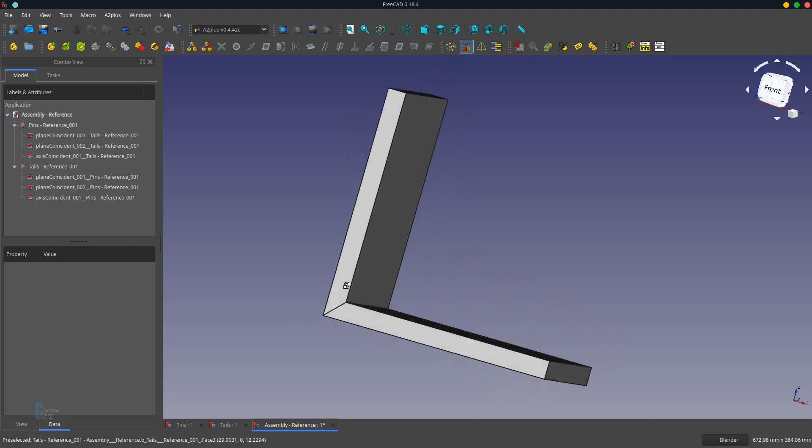It is used in situations where you want the grain from this board here to wrap around the edge and go onto the other board without any of the joinery showing.

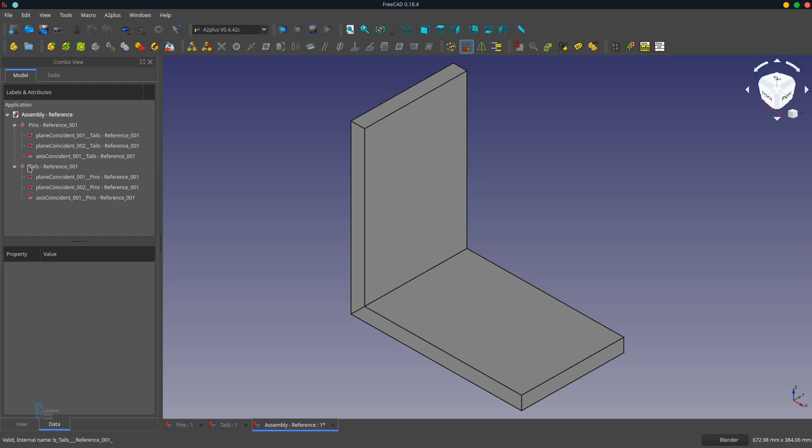The joint is made using dovetails, and if you would like to learn more about how to make those, you can see that in a previous video, which I'll link above. Inside the joint there is a set of pins and a set of tails, just like in a regular dovetail, and they mesh together to provide a very, very strong joint. As can be seen here, you've got your tails and these are your pins.

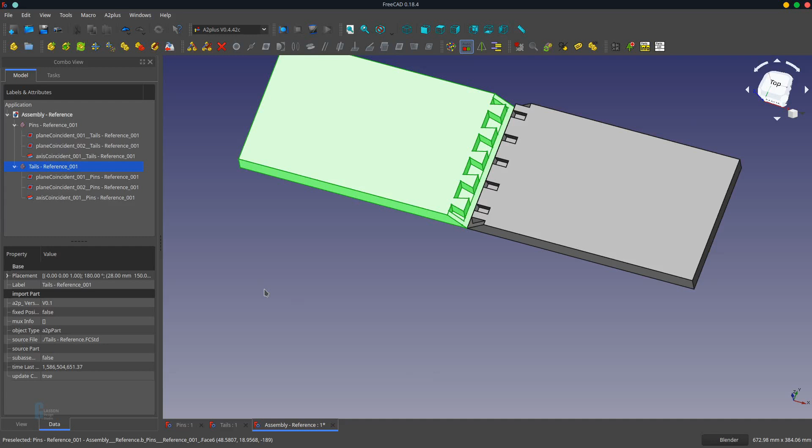So we're going to model this today. Now I've already set up a pin board and a tail board, so we'll just get straight into it. To simplify things for this demonstration, I created a couple of models that contain spreadsheets in them. The spreadsheets simply have the same information and define the board and the pins and tails.

So we've just got the length, width, thickness, lap - this is the distance from the edge of the board to where the pins and the tail start - the half pin width, the full pin width, and the length of the joint.

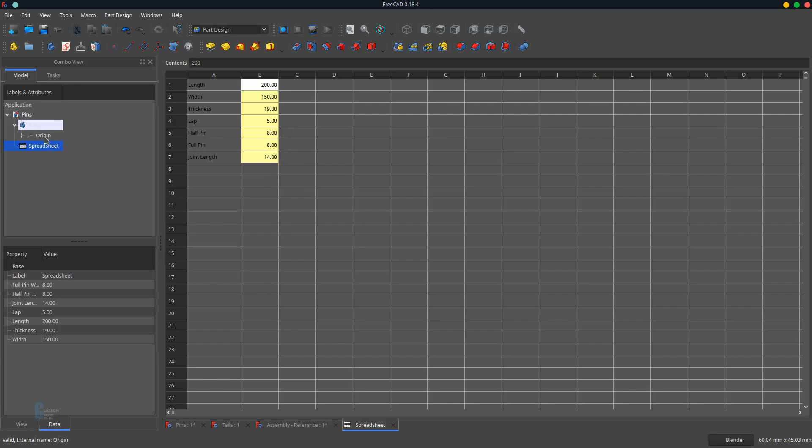So we'll switch over to the part design workbench. We'll work on the pins first.

So we'll create a sketch in the XY plane, and it's going to be a rectangle that is symmetrical around the origin. In fact, there's two ways you can do that. You can either do it by putting two lots of constraints, one across the width, one across the height, or we can simply just pick top left, bottom right, and the center point and do the same thing. It's probably quicker that way.

Now we've got 4 degrees of freedom, because we're missing a couple of constraints, so we'll just put those in. This needs to be a vertical constraint, and this is a horizontal constraint, and then we'll set the length and the height.

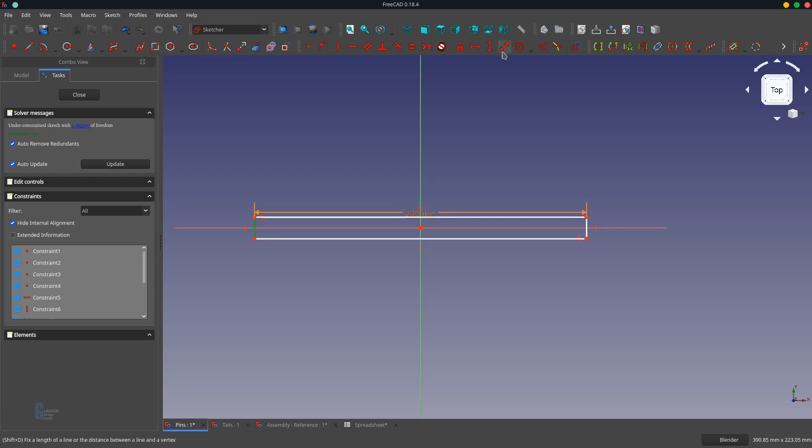Now these come straight out of the spreadsheet. So one is length. Whilst I've been saying height, in this case it's actually the width of the board, so we'll set that as well - width.

Fit, and then we'll just pad it out to be the thickness specified in the spreadsheet. There we go.

Now the design of both the pins and the tails are the same up to a certain point, and we're just going to repeat them in both cases. Typically you might choose to start with the pins, and when you got to the point where you have to deviate to do the different bits of the design, you would save it as a second copy. In this case I'm just going to do both - it's not a big deal.

So what we're going to do is make a space for the lap. We create a sketch on one of the long faces, and we bring in some external geometry, and we're going to use a polyline. What we're going to do is simply make a 45-degree cutout which represents the lap.

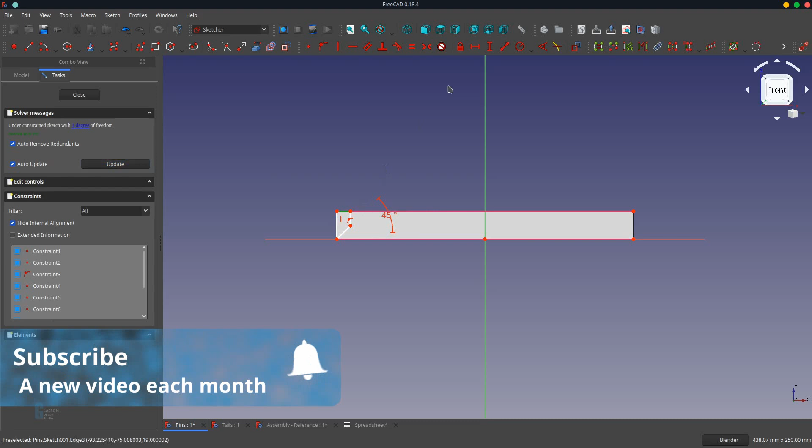That is vertical, and this angle here, we're going to set that as a 45-degree angle. We've got 1 degree of freedom missing, which means that length there is actually the length of the lap, which is in the spreadsheet. So we set that in - that's lap.

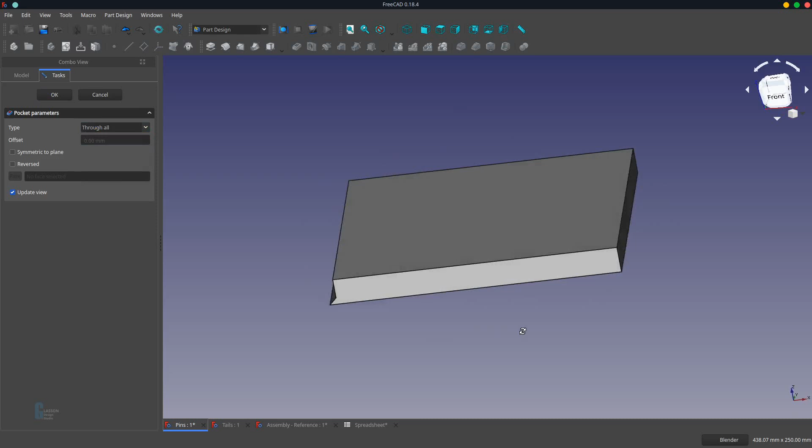And we're fully constrained, and then we just cut it off. Now that we've got the lap, we need to look at what else we need to do.

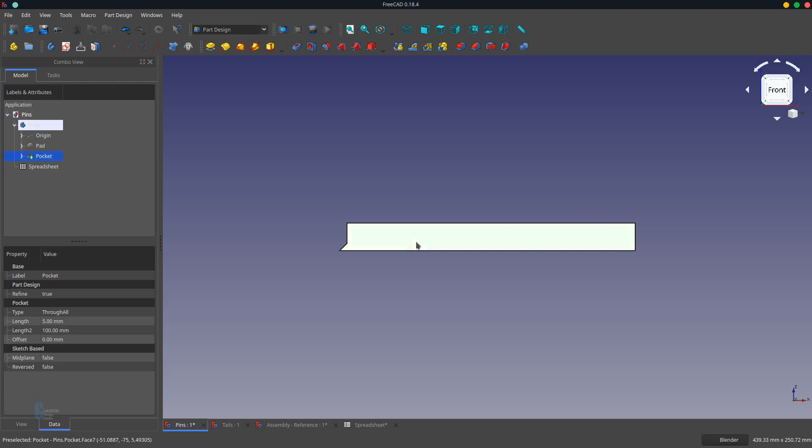So if I jump back to the assembly and just show you the pin board, you can see that there is a full length mitre here, which we need to put in place first. So we'll do that. We click on this edge and we're just going to create a sketch there. We will bring in some external geometry so we can work with it.

This one's a relatively easy one because it's simply an isosceles triangle. That's horizontal, and the length of these guys are equal, which, once I've got all the points together, will make it a fully constrained triangle.

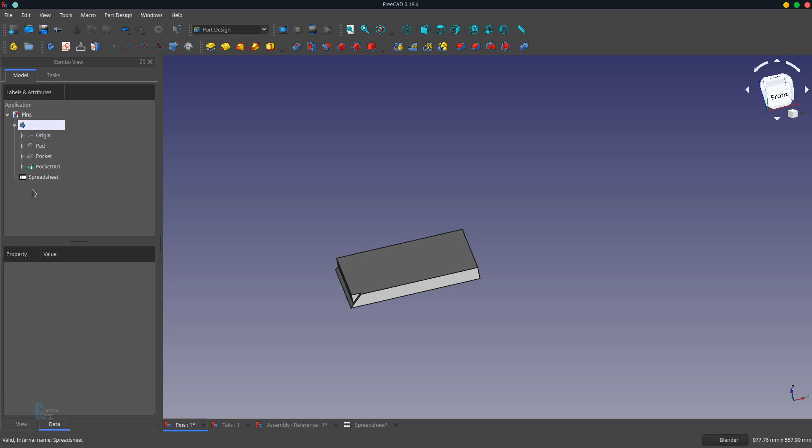What we're going to do is we're just going to make that a 5mm cutout, just like we have with the lap, and then we're going to mirror it on the other side. Rename that to mitre.

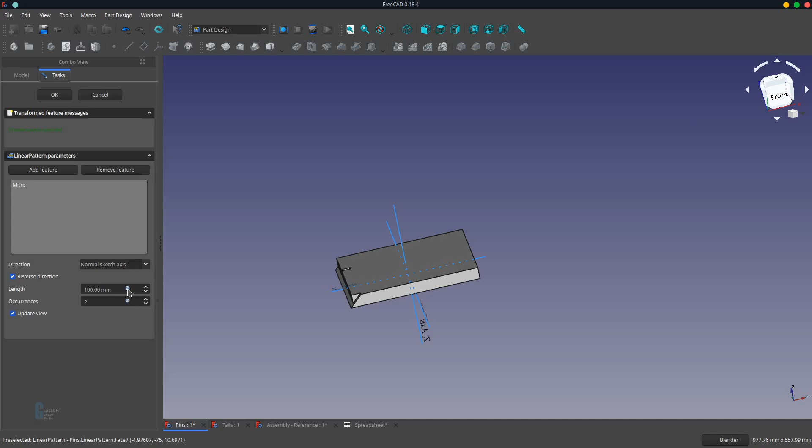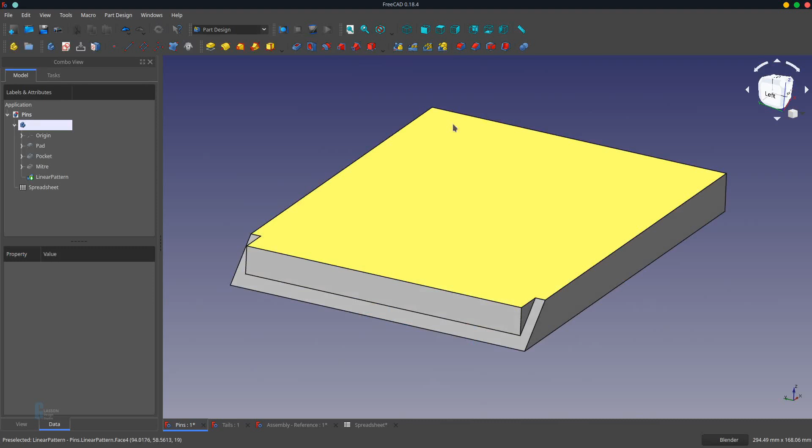There it is. Okay, so normal sketch axis, reverse the direction, and it is spreadsheet width minus the 5 millimeters from the other edge, which puts it right into the place that I want it.

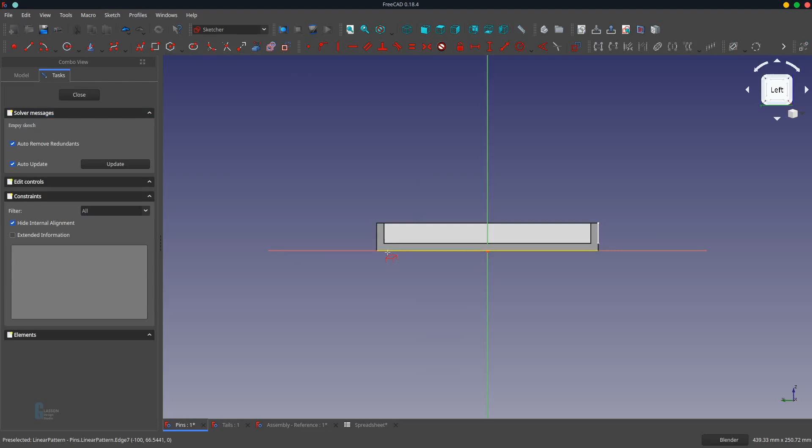Now if we jump back to the pin board in the reference assembly, we'll see that we've got to start modeling the pins, or the cutouts for the pins. So we create a sketch on this face, bring in the reference geometry, that one, and that one, oh, and one more, and that one. We're going to model one of the pin sockets here, then use a linear transformation to make the rest. We're just going to create a polyline which represents the pin.

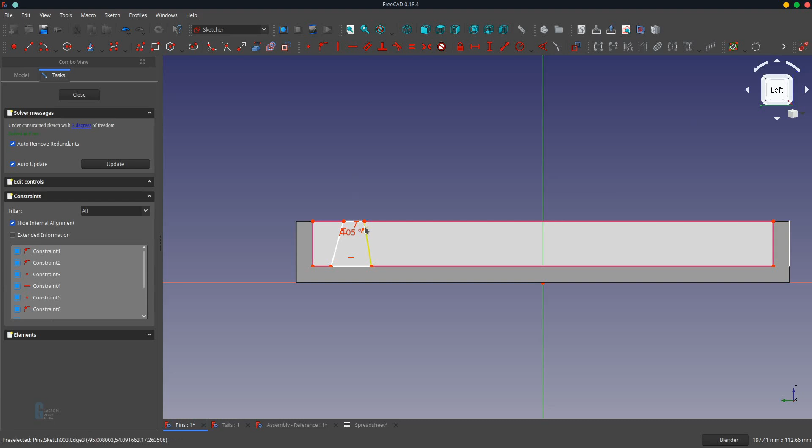Okay, cool. So the angle between here and here, we're just going to make 105 degrees, and same on the other side, 105 degrees. And then we have 2 degrees of freedom apparently.

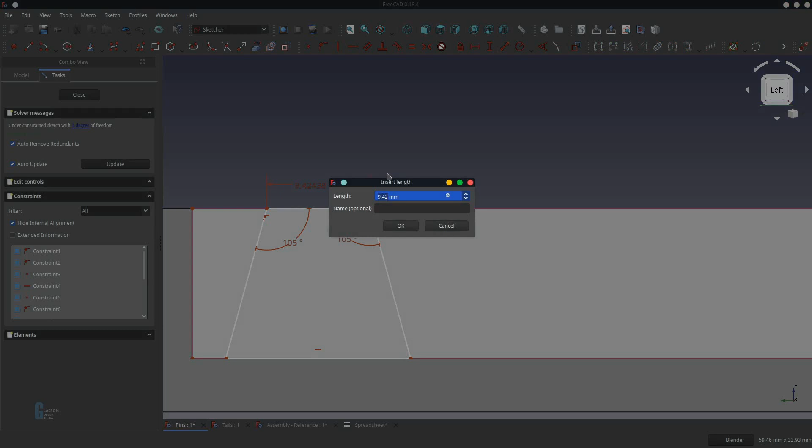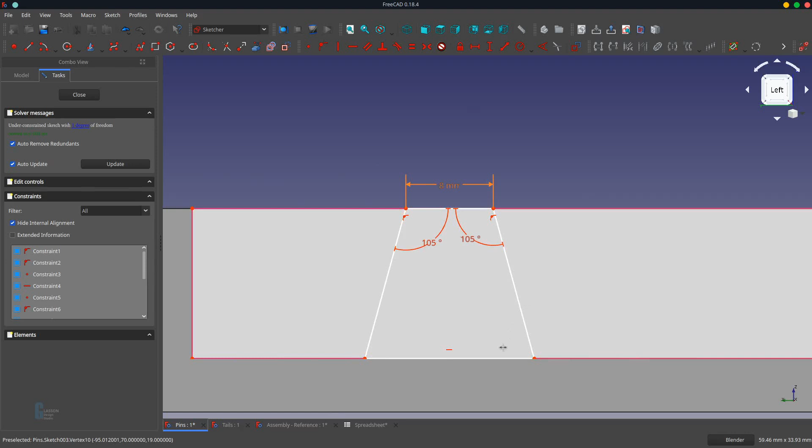So we'll set the width of the pin to be the half pin width, sorry, the full pin width, which is in the spreadsheet. Now we have 1 degree of freedom, and that is the distance from the end. Why is my computer playing up? Quickly close that, jump back in.

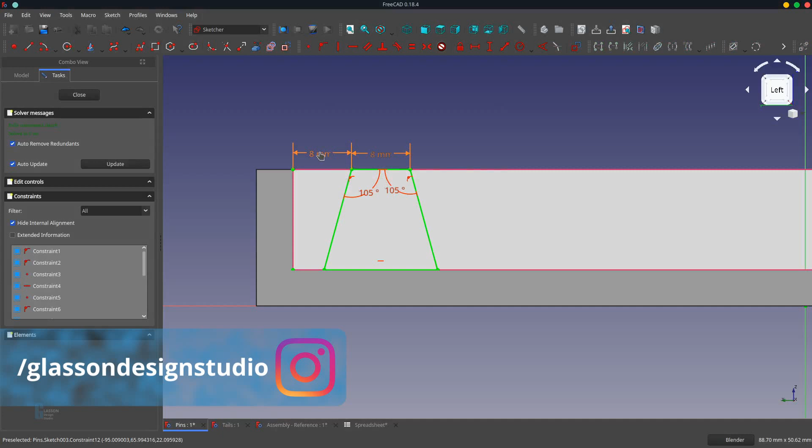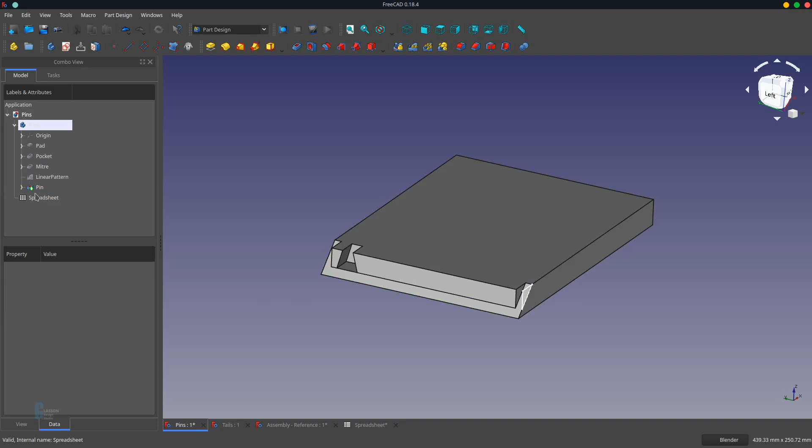And so we're going to go from here to here, and that is the half pin width. Now we have a fully defined sketch, and we are going to not pad that out. We are going to create a pocket. Joint length. Call that pin.

And then we're going to do a linear transformation. We want 5 of them. And the spreadsheet, the distance that we want is the spreadsheet dot width minus 2 times the spreadsheet times the half pin width minus 10 for the 2 miters.

1, 2, 3, 4, 5, and that hasn't quite got it right, has it? So maybe it's just minus the miters, because the half pin width.

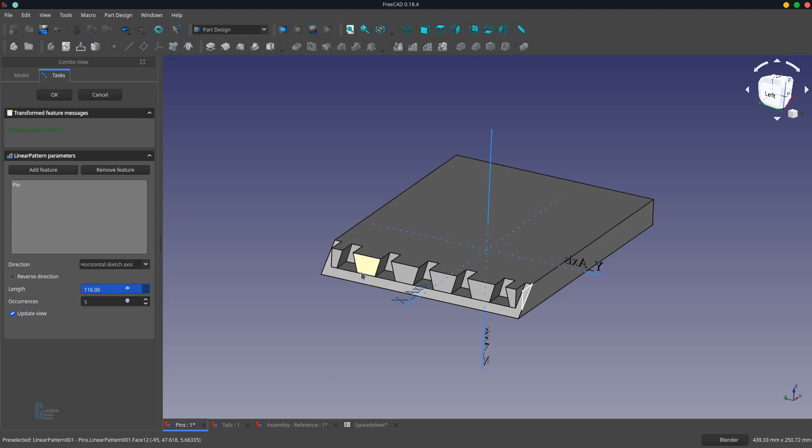Maybe spreadsheet dot full pin width. Okay, that's better. 1, 2, 3, 4, 5. Okay. Where I went wrong in this one is I forgot about having to take off the first pin as well. So that gives us our pin board all ready and done.

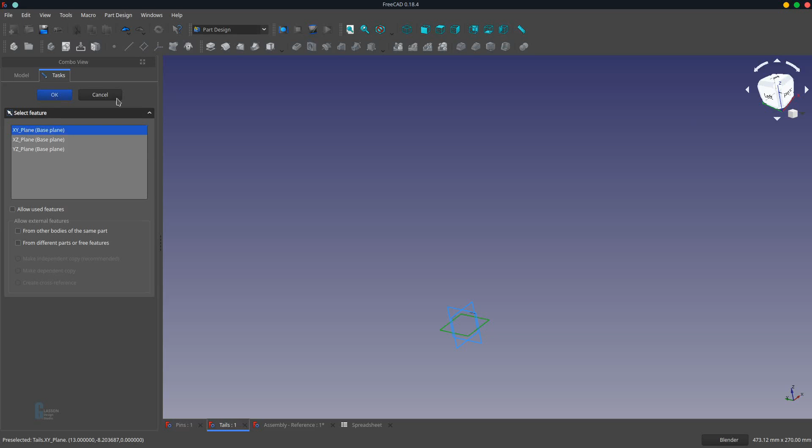So what we're going to do is jump across and do a similar sort of thing in the tail board. So we've got the body in place, so we'll create a new sketch on the XY plane. Just going to put a body around it and make it symmetrical to the center line.

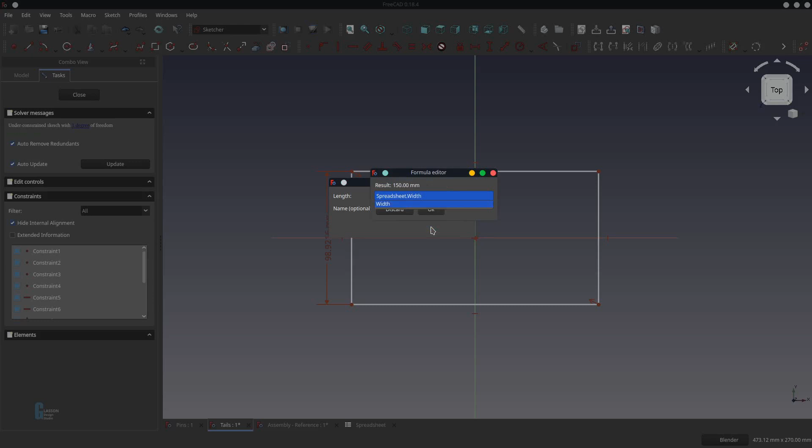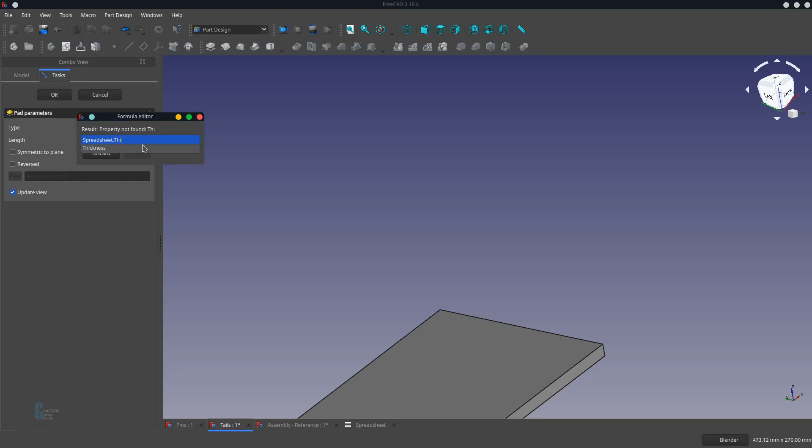The width of it is defined in the spreadsheet. Same with the height, the length. And we pad that out as before to this thickness. Okay.

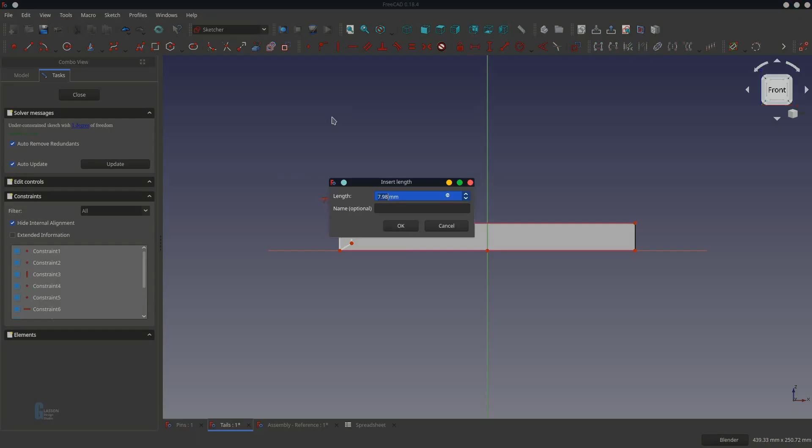It's now time to do the lap. So we create a sketch. Yeah, it's fairly easy to do this one. It's really just repeating what we did last time. Width of that bit is the lap as defined in a spreadsheet. And the angle here is just 45.

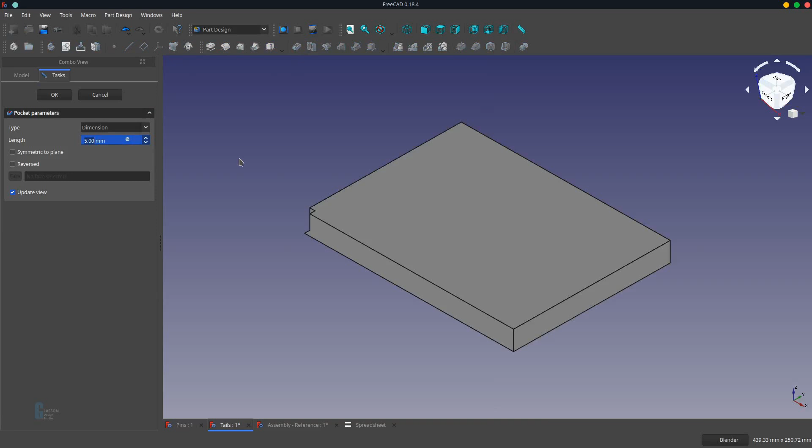We then create a pocket the whole way through. Call that the lap. And then what we're going to do is we put the miter edges on. So again, we create a sketch on the same face, bring in our geometry.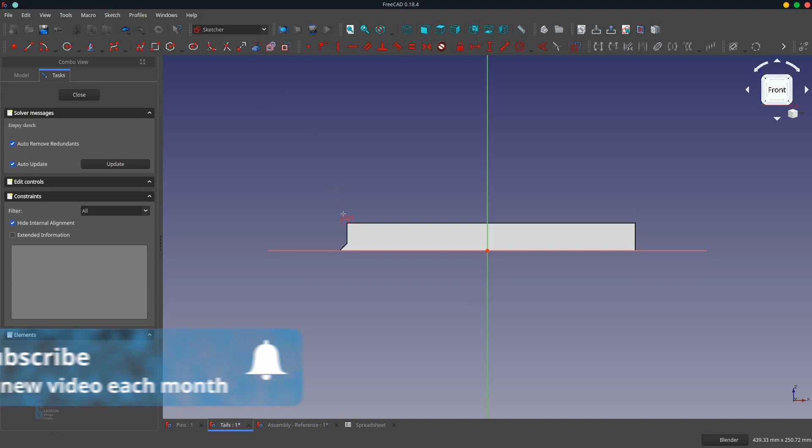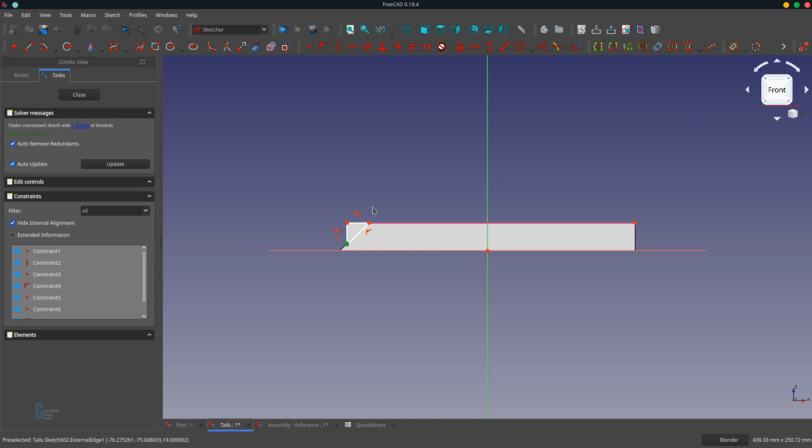These guys are equal, and oops, we didn't quite get that joint right. Close that up, and we make a pocket of 5 mil. Miter, and then we're going to mirror that to the other side.

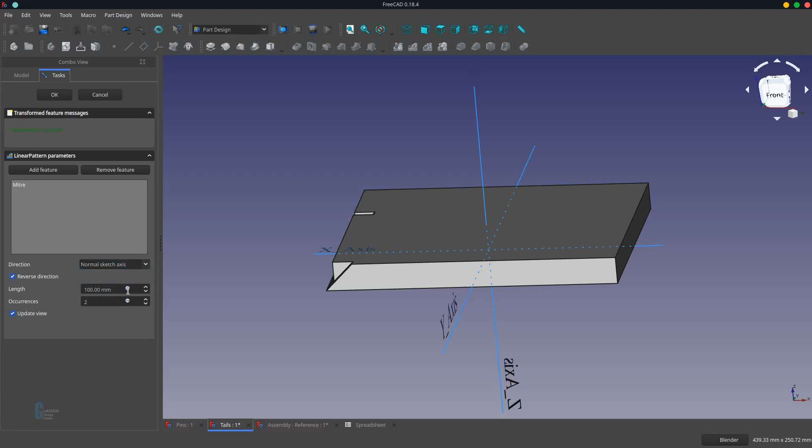On the normal sketch, it's reversed, and width minus 5, and okay.

So now we're going to do the tails. Create a sketch on this one. And we're going to remove everything that we don't want. So first up we'll do the half pins.

That one's a vertical, and it is the half pin width as defined in the spreadsheet. Now it's easy to get these turned around, so we'll have to check them once we put the assembly together. And we're going to cut a pocket out of that, and it is going to be the joint length.

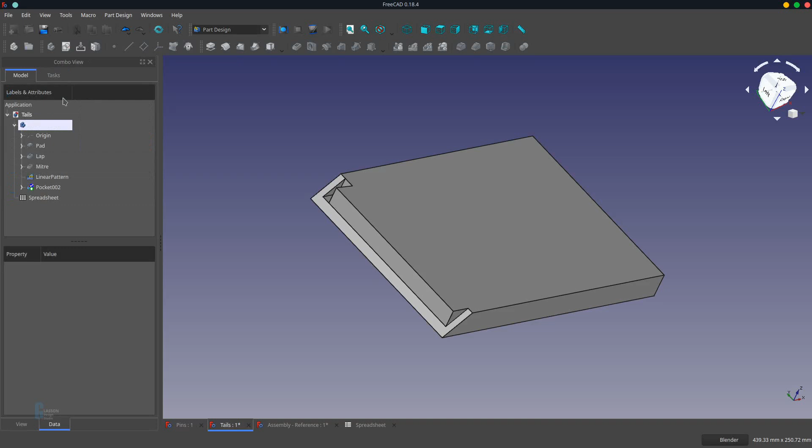Half pin, and then we're just going to use the linear feature to get rid of the other one. Vertical sketch, that's right. And it is going to be minus spreadsheet width minus the mitre, I think. See how that one goes.

Oh, too far. Alright, so what it means is we then also need to remove the half pin width as well. Should remember that from last time. 2 times the width, 2 times the miters.

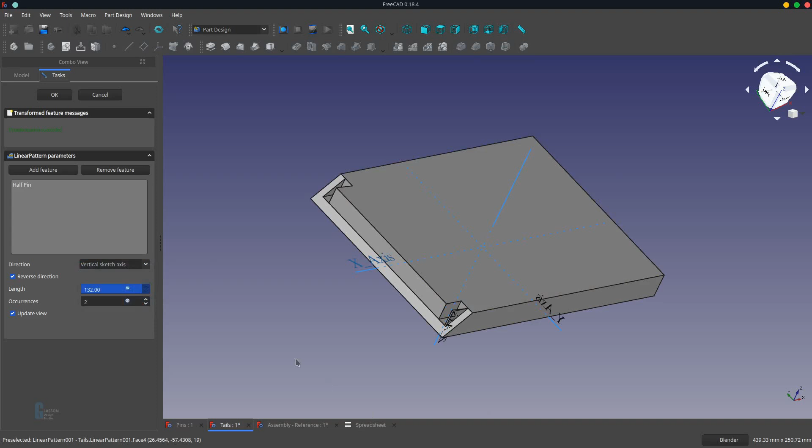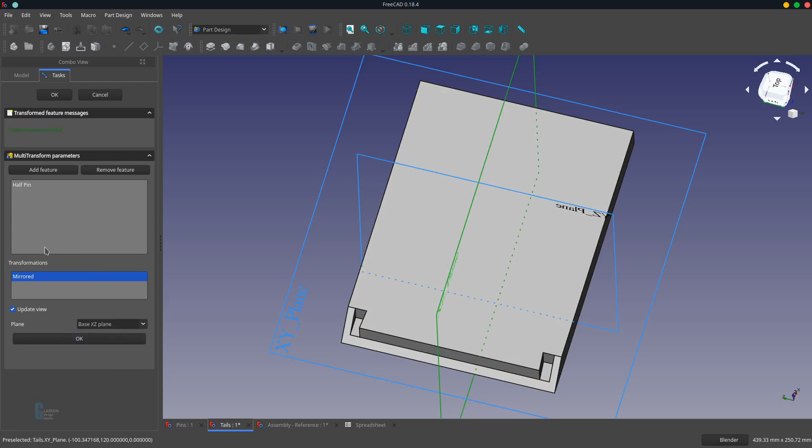There we go. And it's not a, it's a mirror, you idiot. Cancel that. We're going to add a mirror. Mirrored on, there we go, on the vertical axis. That gives it, that makes it so much easier.

Now we'll do the other pins - remove the other pins, I should say. So we bring in that and that. Again, we do a polyline.

That one there, the base of it is the spreadsheet dot full pin width, and this angle here is 105 because we want it going out, and we've got 1 degree of freedom in here somewhere.

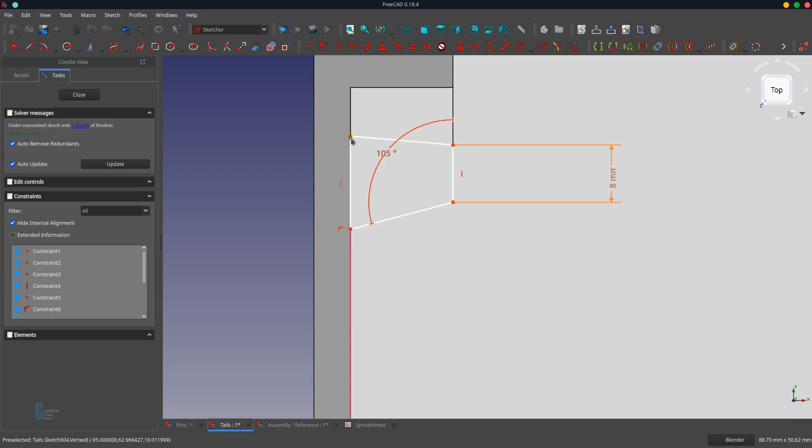Okay, so we've got these 2 points not coincident and joined, so now they are. Oh, we went the wrong way. Sometimes it happens. I'm an idiot. So we'll get rid of these.

I need to bring that one back in again, because as I said, it can be quite easy to get these things turned around if you're not concentrating as much as you should be, especially when you're thinking in terms of pins and tails, and forgetting that you're actually taking away the waste, not keeping the bits you want to keep, which is how you would sort of do it when laying it out.

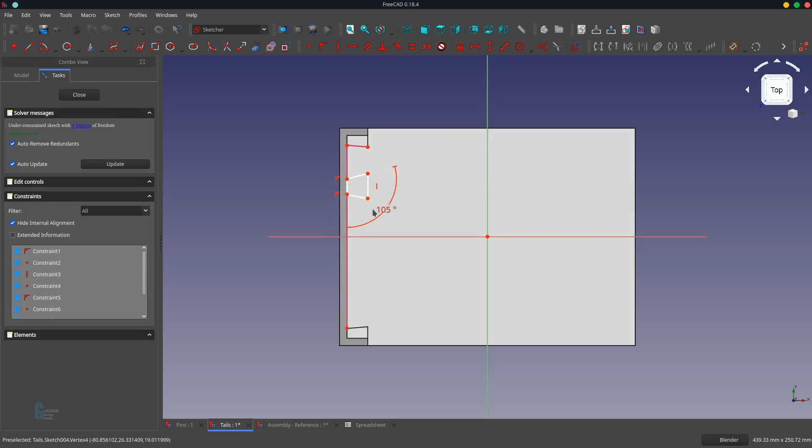You would do - when you're laying out the tails, you measure out the tails and then cut away the waste. In this case, we're sketching the waste to cut away. So sometimes I find it easy to get my head turned around and not think, and get them, and do the pins when I'm supposed to be doing the tails, and vice versa.

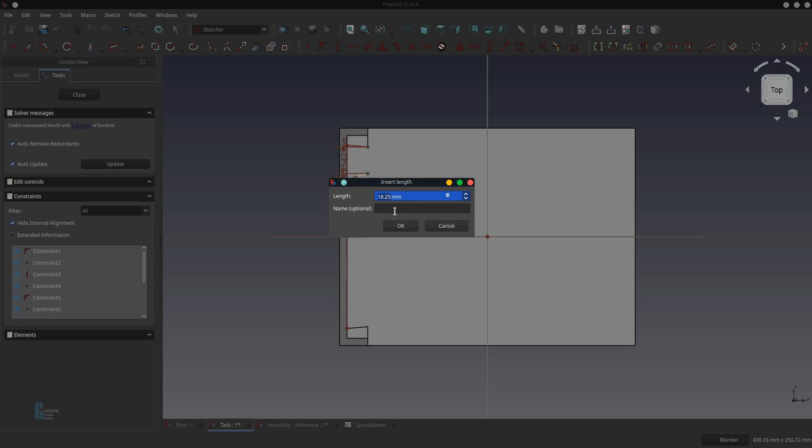Okay, so from there to there is the full pin width. Actually, no, this one I think we're going to struggle a bit. That's the full pin width.

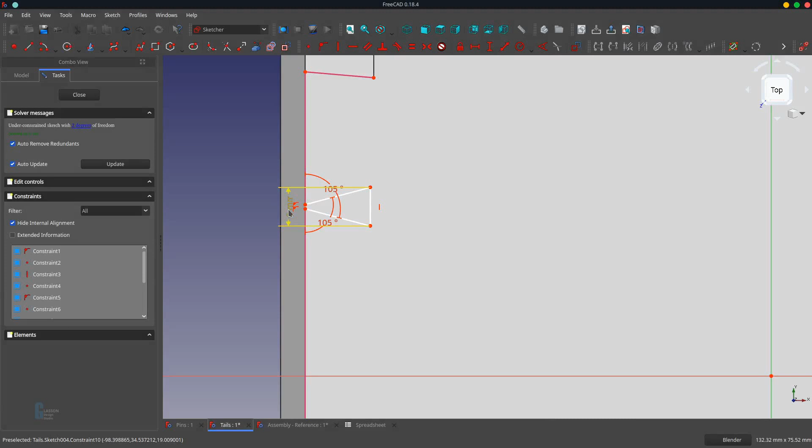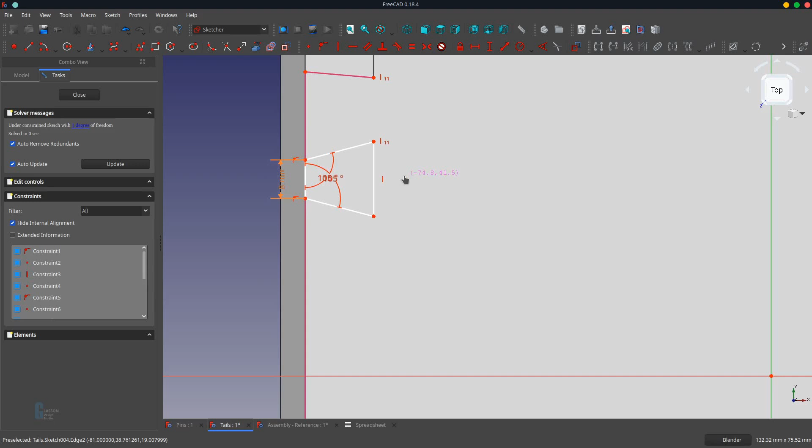No, in actual fact, the full pin width is actually on the front. Put a vertical constraint in there to make them the same. Now we're just moving here. So I've got a funny feeling we might just have to sketch all the bits. Might be just as quick.

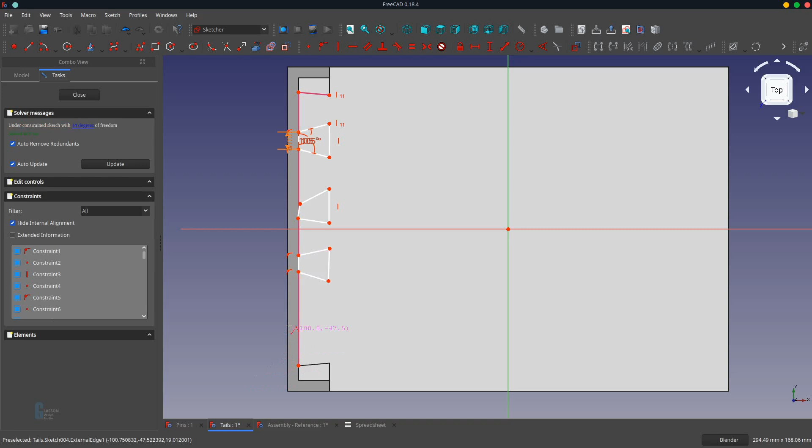That vertical, that, and that are all equal. That, and that. Oops, these are not joined. Let's fix that. These guys are all parallel, and so are these guys.

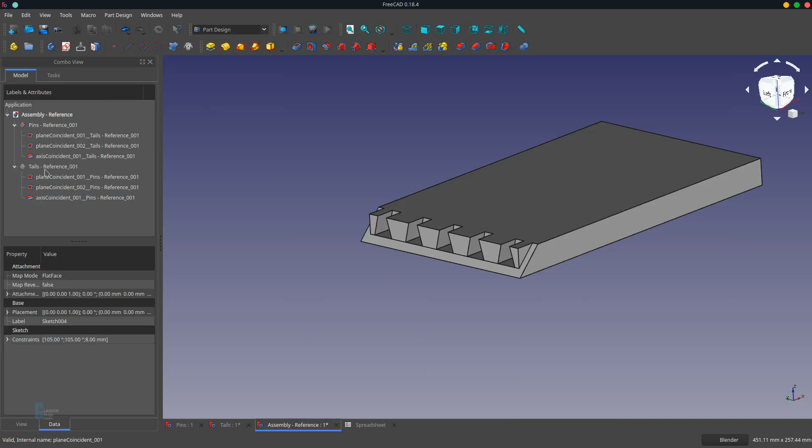Alright, so I'll switch over. Hang on, before we do that, let's quickly check. Go back to turn off our pins, come back to our reference, and we'll see that we've got 5 tails. So I need to put another one in somewhere.

Constrain that to be vertical. Again, also make these guys all - probably doesn't matter because I'm going to stick some construction lines in a moment just to help finish it off.

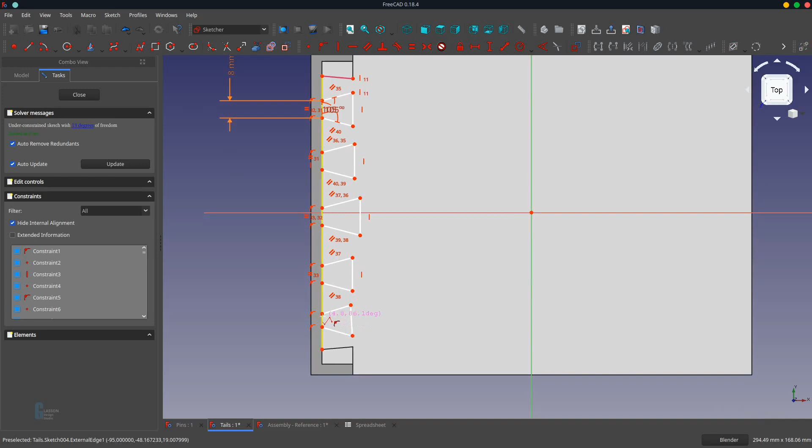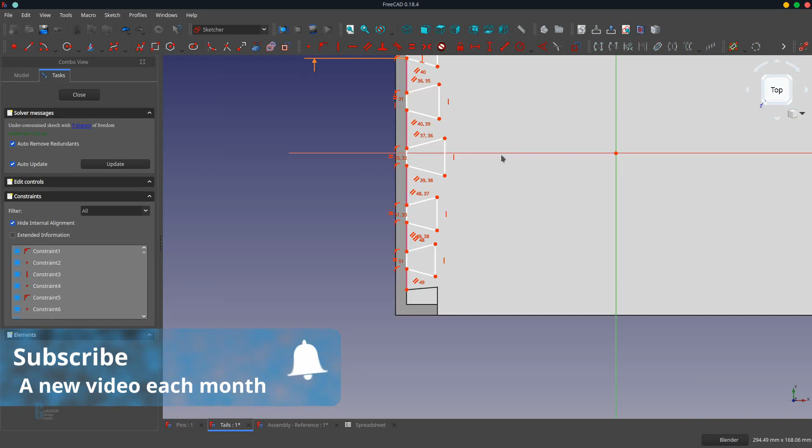Parallel, that and that. Parallel, that one is vertical. That and that are equal. So now we'll click the construction lines in just so we can...

That one's vertical, that one's vertical, that one's vertical. Put those together and put those together. And that one too is vertical.

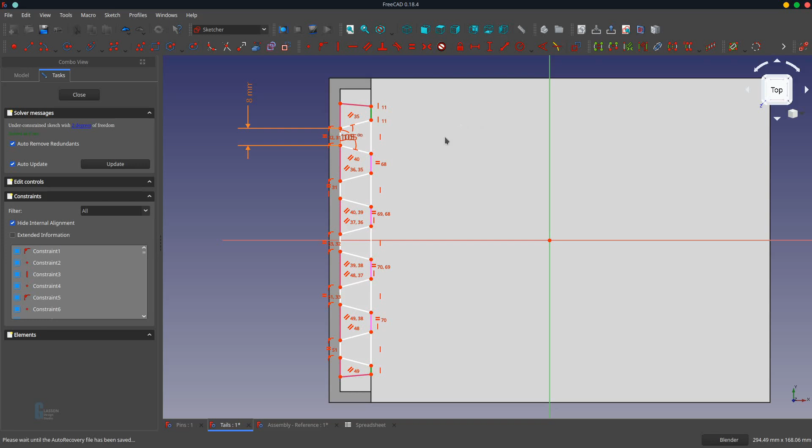So we've got 5 degrees of freedom now. What's going on here? Okay, so they're all moving, right? Da, da, da. These guys are all equal as well, except that one. Equal. That and that. They're all equal to.

Right. And we're just going to punch those out, and that's going to be joint length. One, two, three, 4, 5.

Okay, so now what we'll do is we'll create an assembly and try and put this thing together. So we'll switch over to the A2 Plus workbench. Oops, forgot to save it. And we will add the pins, pin board, and we will add the tail board.

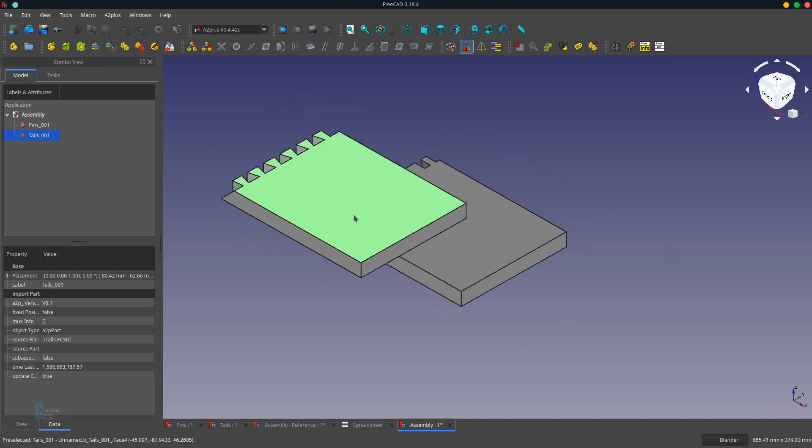And what we'll do is we will rotate the tail board, transform the tail board so that it is in the right orientation for where I want it to go. We'll just zoom in a bit and try and line things up, and as we can see, we've already got a bit of a problem here.

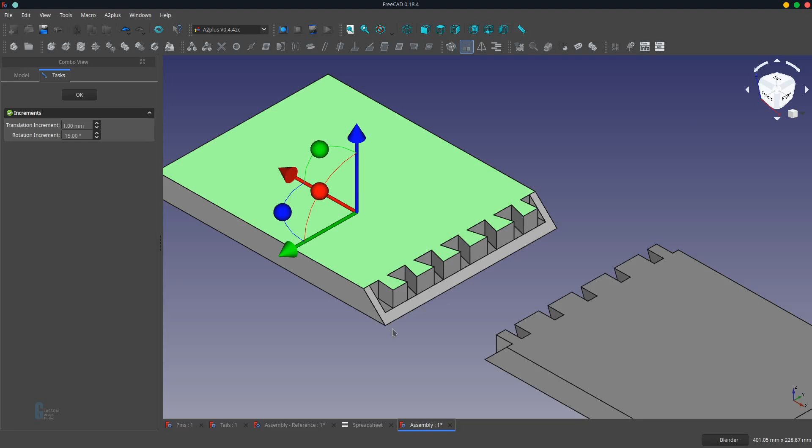So I've got six pins on this, or six tails on this side, and five pins here. Okay, so that's okay, we can go and fix that.

So jump back into the tail board, we'll go back into sketch, and what we'll do is just remove one of these and reassociate all the geometry.

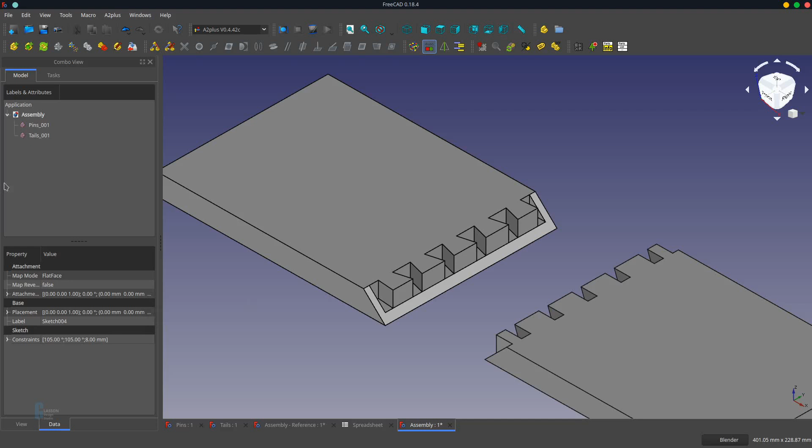Push that through, save it, and come back into the assembly and refresh it. And that's starting to look a bit better. And we'll finish the transformation, so we'll turn it at 90 degrees to itself, so it's vertical.

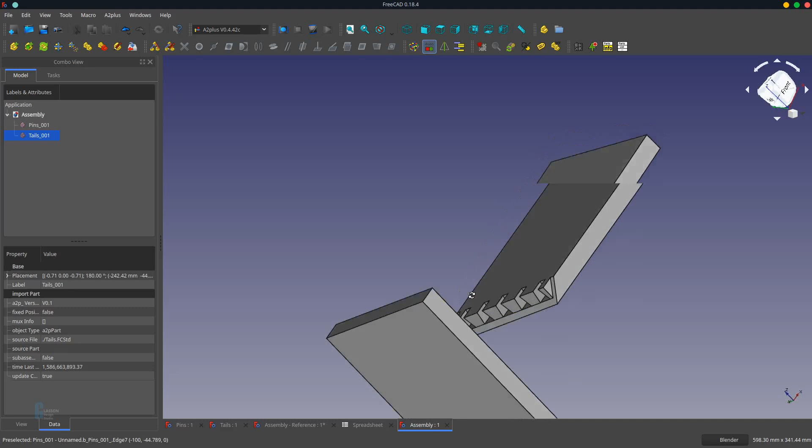Now what we're going to do is just try and constrain it together and check to see that I've got all the joinery correct. So we'll use that main face there and this face in here, and we'll do a coincident constraint, bring it together. Oops.

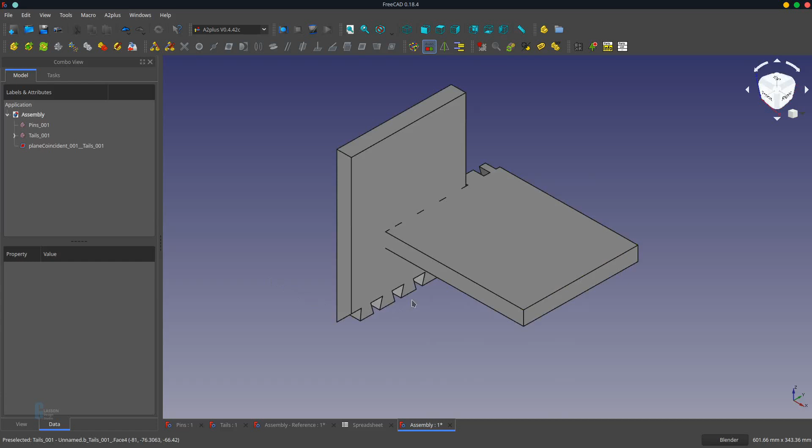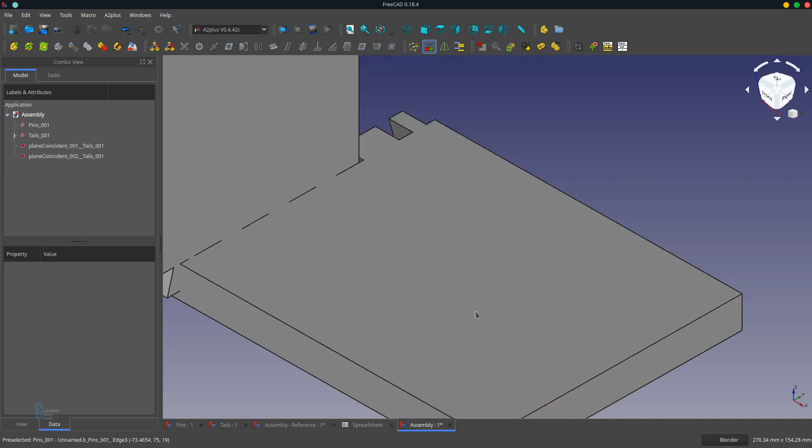And obviously I'm going to struggle a little bit at the moment, but we'll see how we go. So I'm going to select this bottom face, actually make it this bottom face, and zoom in on this bottom face and use that, doing a coincident as well, accept that. And so what we have now is that they are mostly in the right place. Zoom out a bit, but you can see it's an overhang.

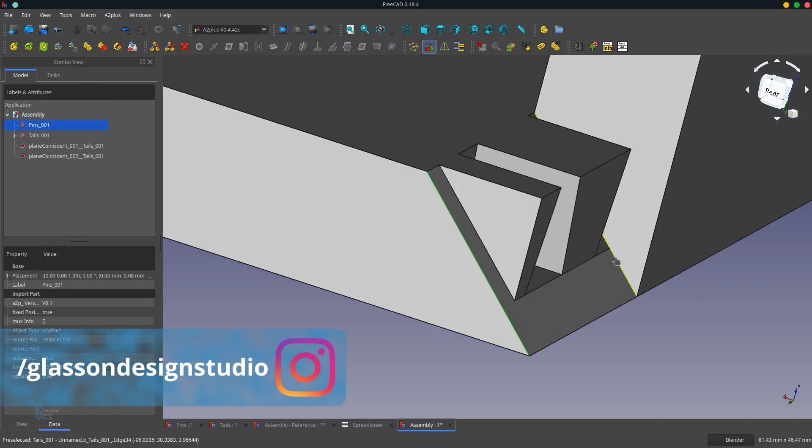So what we'll do is we'll go to the back view, a bit of an angle so I can see what I'm doing. I'm going to select that line there and this line here, and then we're going to do axis coincident constraints, pull it all together, and now we have, oops, now we have it put together.

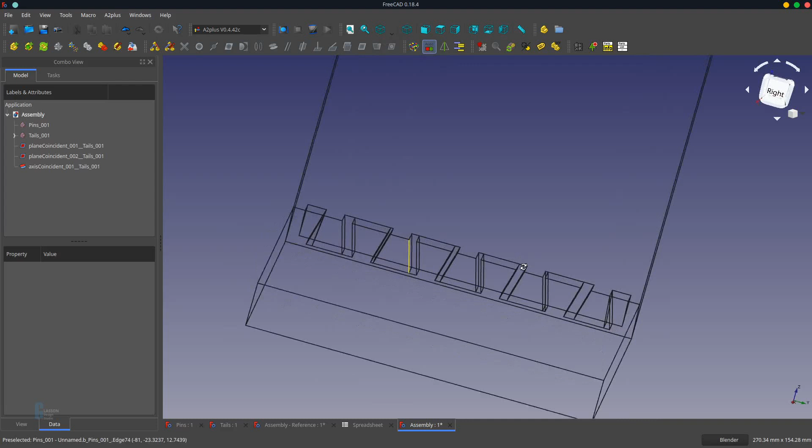What I don't know yet is whether I've got all my geometry right inside, so I'll switch to wireframe, and we can see that something obviously is not right. So that's the tail board, and that's the pin board. So it looks to me like the tail board is out, and again, this is what I was kind of getting at when I said you can get your head turned around.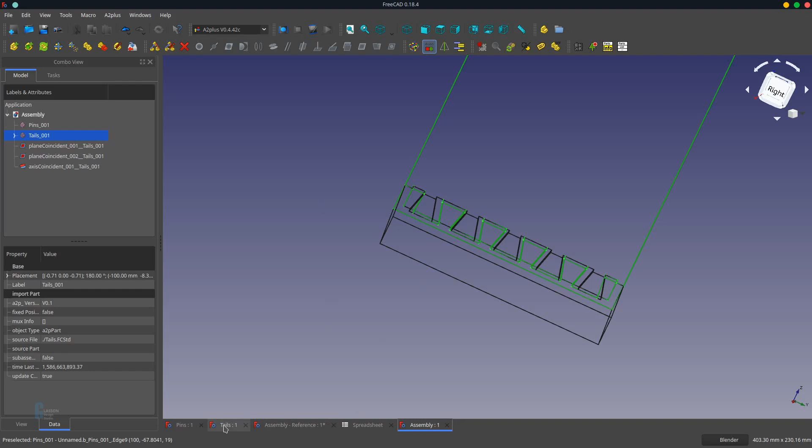So we'll save that and we'll jump back into the pin board, and we'll just quickly check the sketch, because what I think I've done is I've set the width of the half pin on the tail board to be here when it should have been there. Maybe it could be the other way around, but we will check.

Yes, and I think I did. So let's take that one out. Let's pop that on the other side.

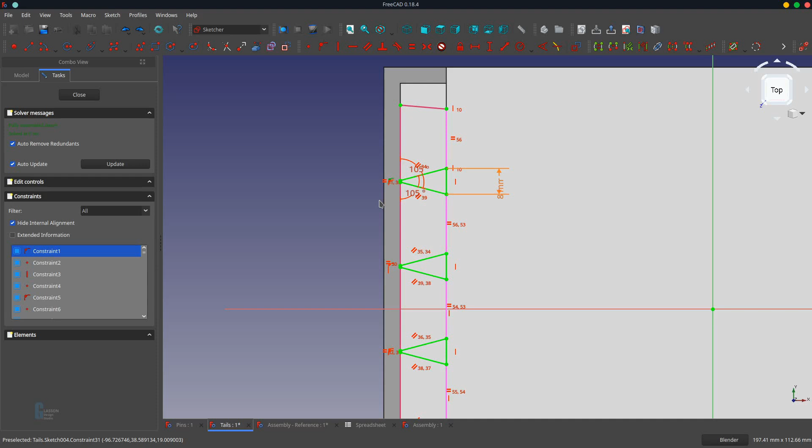But what makes it interesting is that that has now changed to here. So I think I was right the first time. And we'll leave it there. Maybe what I did was do it wrong on the pin board.

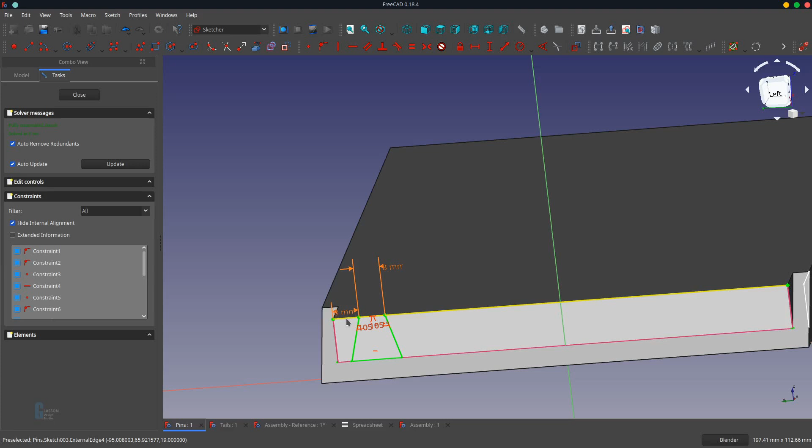So we'll go back to the pin board and we'll just check that. Yeah, that one's, maybe it's this. Okay, so come back into here.

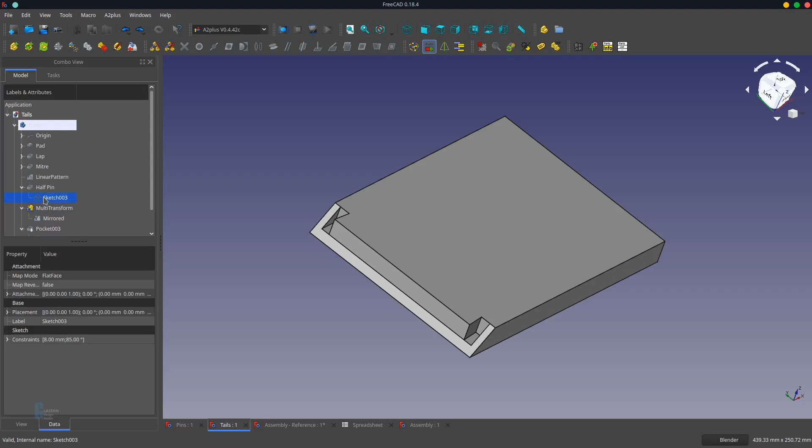What I did differently last time is I did the half pins in with the final sketch, so I wonder whether I've messed this bit up. There, that's the right spot.

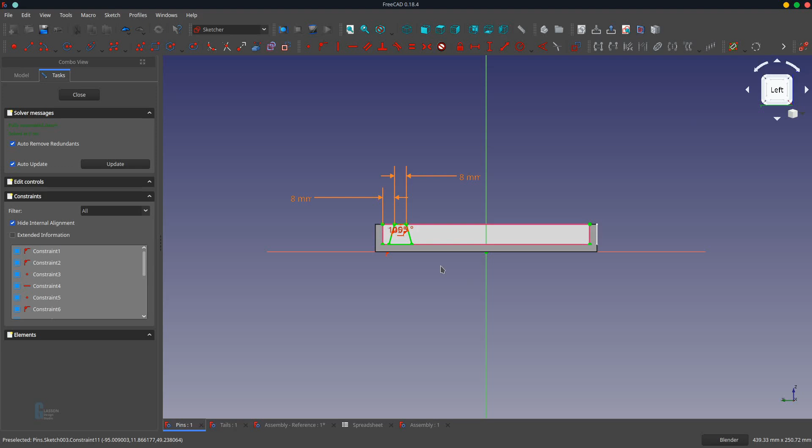Okay, I know what I've done wrong. Alright, coming back to here. This one is 8mm, or the full pin width, not on the tail itself.

Right, that's probably looking a bit better. Let's close that. Let's turn the pocket back on. Let's see what we've got. That's looking all right. Save that, come back into the assembly, refresh it.

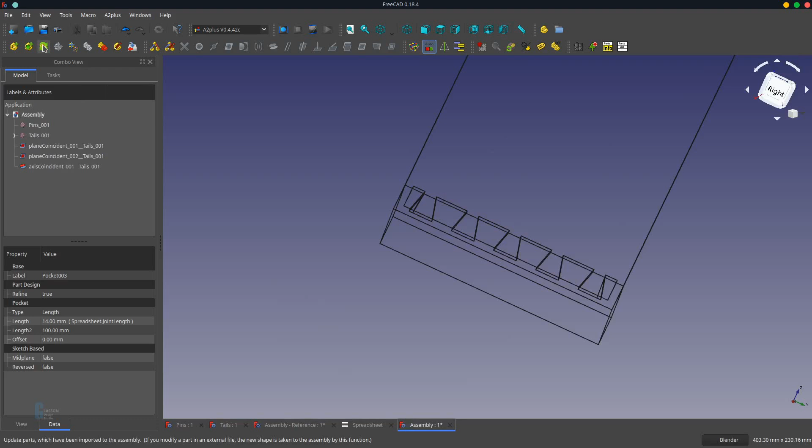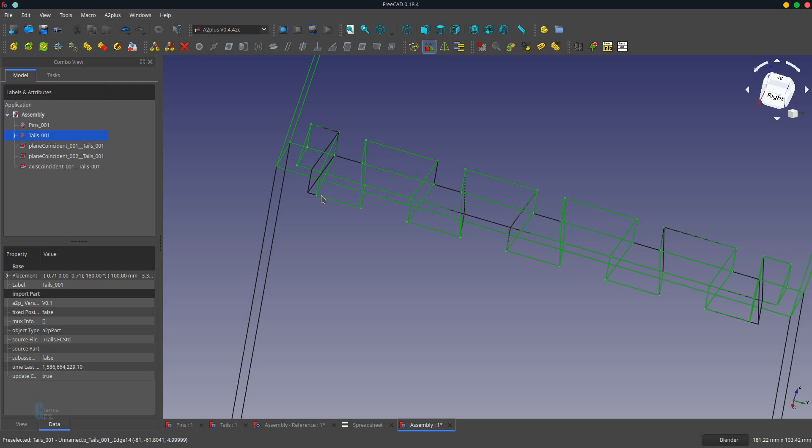Okay, and we're still fractionally out, and it looks like it's the first and last tail that's wrong. Not enough angle on it here. Okay, so we'll just jump back in there.

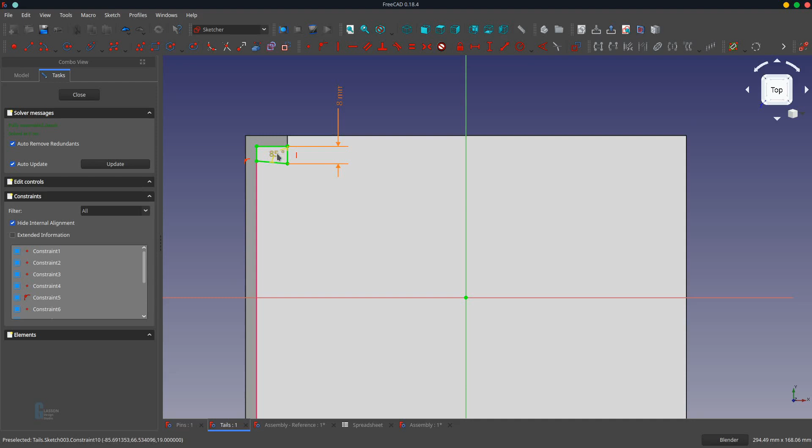In fact, it could actually be the pocket that's the problem. Let's go back to this one here. Yes, because that's out. It's not 85, it should be 75, because the other ones are 105.

Basic geometry, you idiot. And that fixes that.

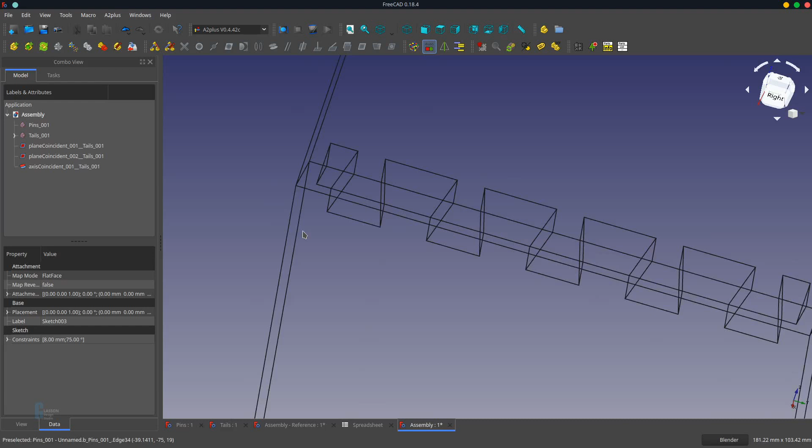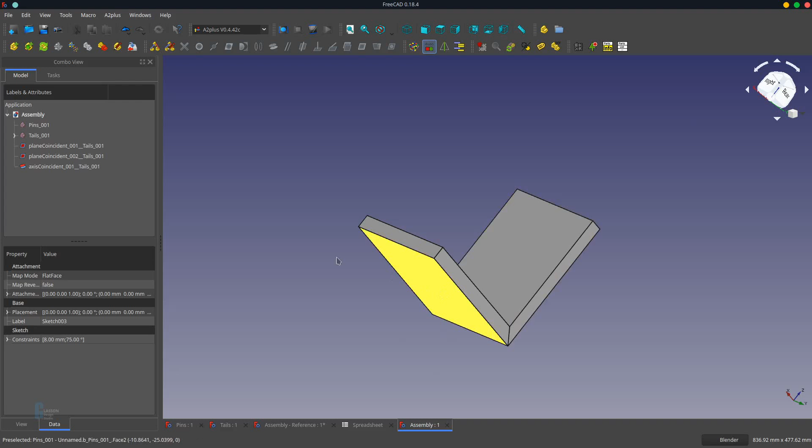So you can see that it's not terribly difficult, but as I proved due to my own mistakes, you can actually turn yourself around inside your head fairly easily and put things in the wrong place.